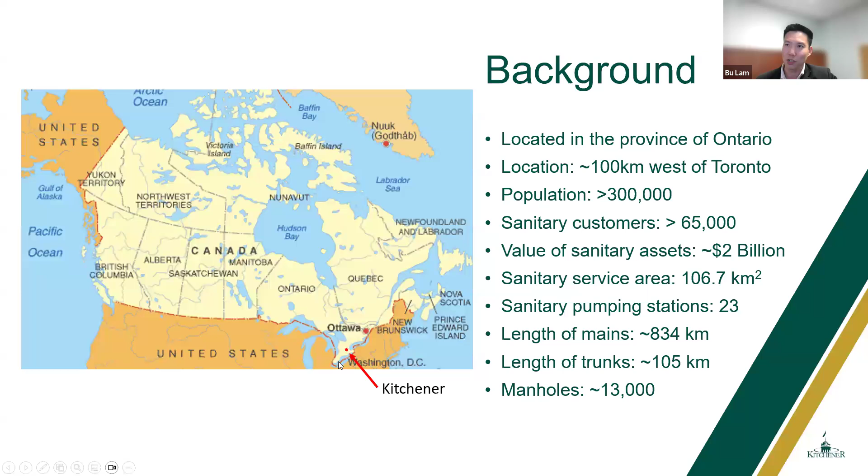Really quickly, some information on where we are in Kitchener. Here's a quick map of Canada. We're located in the province of Ontario. That little dot near the bottom, just above Washington, D.C., that's Kitchener. We're about 100 kilometers west of Toronto. Everyone around the world often thinks of Canada with Toronto as the epicenter, so we often reference Toronto when talking about where we're located.

So the CN Tower is kind of where that arrow is pointing, and Kitchener is approximately 100 kilometers west of there, so we're a little further from the lake. The city itself has a population of over 300,000 people, which translates to about 65,000 customers from a sanitary service perspective. The assets we have for the sanitary utility total just over $2 billion. Our service area is about 107 square kilometers, and throughout that area we have 23 pumping stations, about 834 kilometers of sanitary mains, and 105 kilometers of trunk sanitary sewers. There's also 13,000 manholes that we have to service.

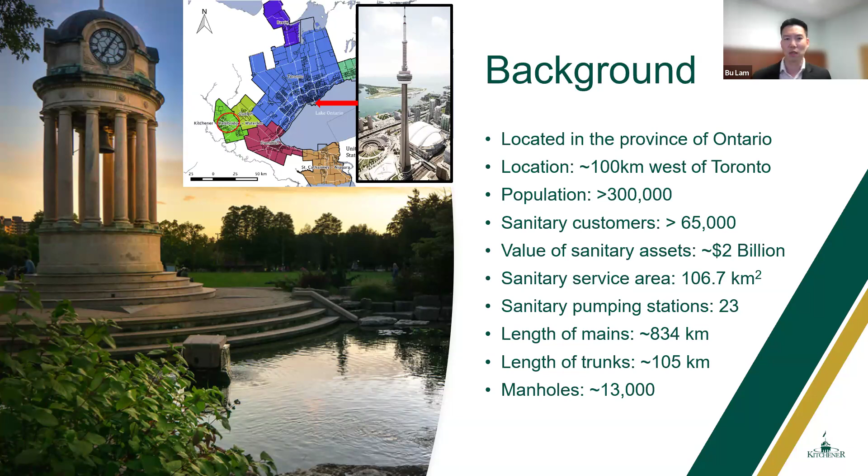I wanted to describe our approach to delivering wastewater services. When we're talking about our capital and our pipes, most are actually replaced through a linear asset replacement program, which are essentially full road reconstructions. We call it our triple-funded utility replacement program. This means the water infrastructure, sanitary infrastructure, and stormwater infrastructure, all residing underneath the road surface, typically get replaced at the same time. So if we're excavating for one utility, we usually take all 3 at once, which ensures the pipes in the worst condition get rehabilitated as much as possible, and also gives us an opportunity to fix the road surface. Typically we do about 6 kilometers of full road reconstructions on an annual basis.

We prioritize most of our projects from age and material. If we have condition information available, we usually apply that as well to make some of those decisions. So a pipe that might be 80 years old might be in better condition than a pipe that's 60 years old. In that case, if we had condition information, we would prioritize the 60-year-old pipe before the 80-year-old pipe for replacement.

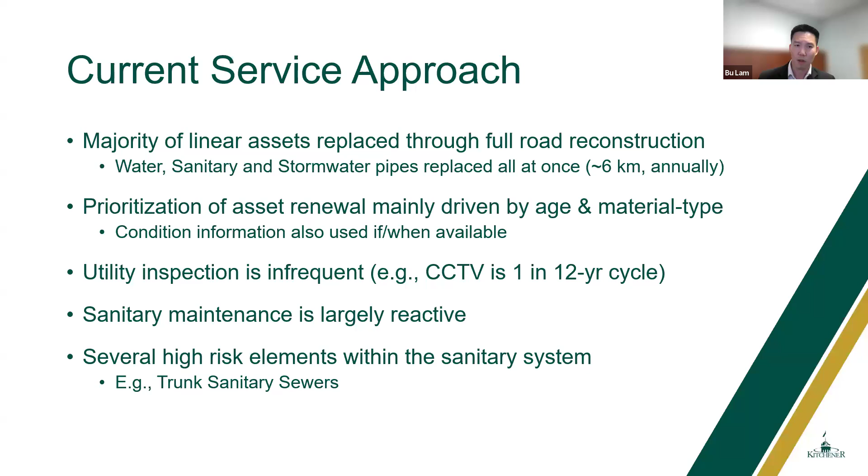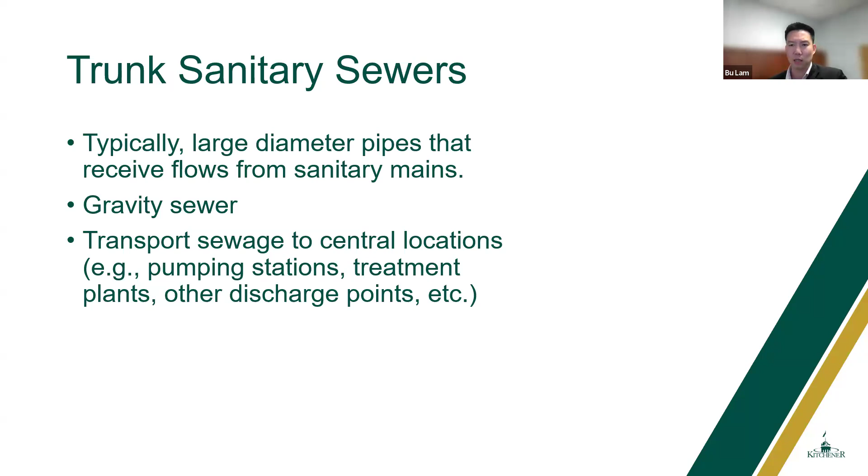Trunk sanitary sewers, sometimes called interceptors depending on the municipality, are typically large diameter pipes that receive flows from sanitary mains. They are gravity sewers, so there's no pressurization. The trunk sanitary sewers are meant to transport sewage to central locations like pumping stations, treatment plants, or other discharge points.

I often liken our trunk sanitary sewer network to veins in the human body. Think of arteries as the pipes that carry water into the system, and the arterioles as the distribution mains into the houses. The capillaries are really where the services happen to the houses, where the water is used, then flushed into sanitary mains that eventually go to these larger sanitary trunk sewers.

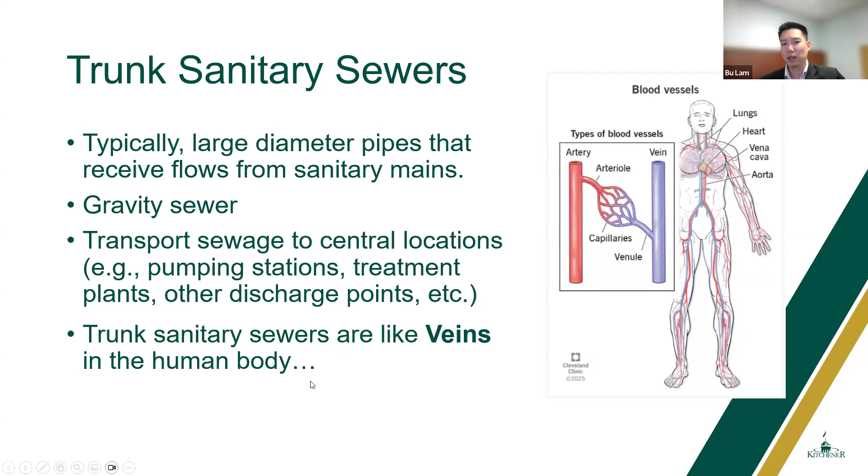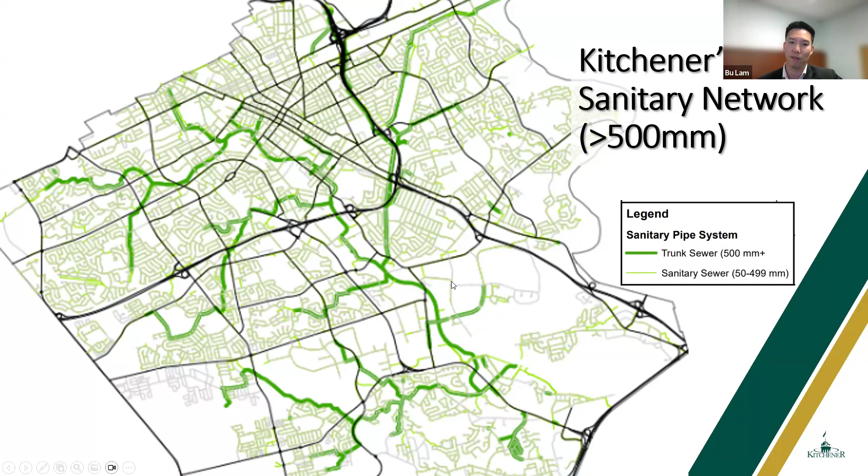There are actually 4 distinct neighborhoods that drain or get captured by this Ottawa trunk sanitary sewer. That drainage area is about 20 square kilometers, representing approximately 20% of the city serviced through that one trunk sanitary line. There are approximately 6,500 service connections to that trunk sanitary sewer. Even though that number seems moderately high but not super high, it's because a lot of this area actually has high rises and multi-residential units. A multi-residential unit may have, let's say, 200 or 300 people in it, but we only count that as one service connection. So again, there's a lot of connections, a lot of flow that goes through this pipe.

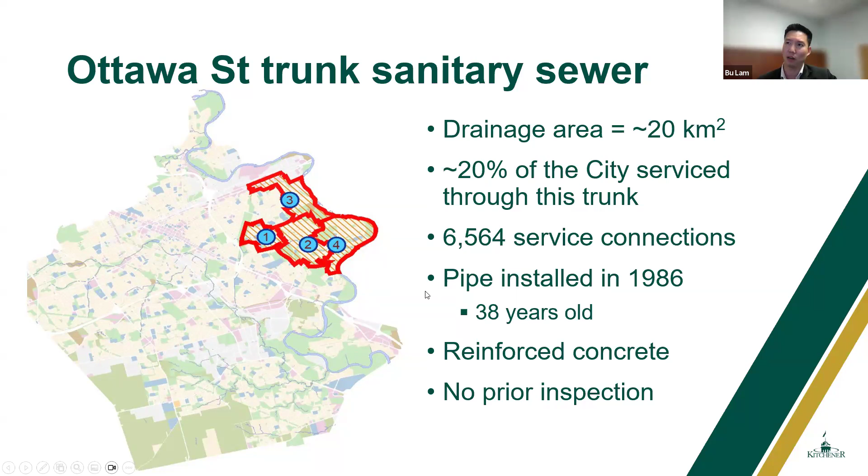The Ottawa Trunk Sanitary Sewer was installed 38 years ago, in 1986, so it's not that old. It's a reinforced concrete pipe. To our knowledge, since its installation in 1986, we've had no prior inspection of that infrastructure. So we really didn't have a lot of eyes on this, and we didn't really know the condition or the state that the infrastructure was in.

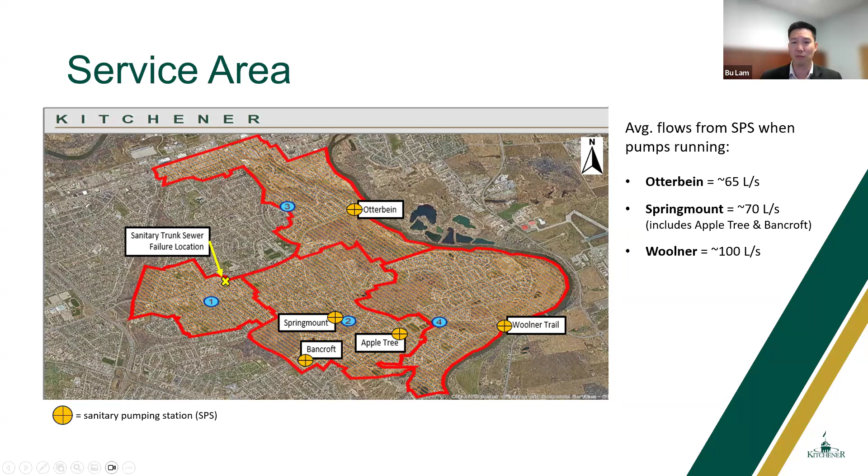So here's a Google image of what the area actually looks like. What I've done is marked the area of the failure with the yellow X. The direction of the arrow shows the flow, because the trunk sanitary sewers are all gravity fed. You can see how dense and how many houses there are, all feeding towards this one pipe that runs along the same parallel length of this road. So when you have a break in that one section, you're essentially disrupting the flow for this entire area of the city.

This road itself is Ottawa Street. It's a major street with 4 lanes, 2 in each direction, and it's also got bike lanes. In and along this area there are commercial establishments, and there's residential, as you can see. And just to complicate matters, this break happened to have occurred just outside a fire station, so we had to manage emergency response during our time.

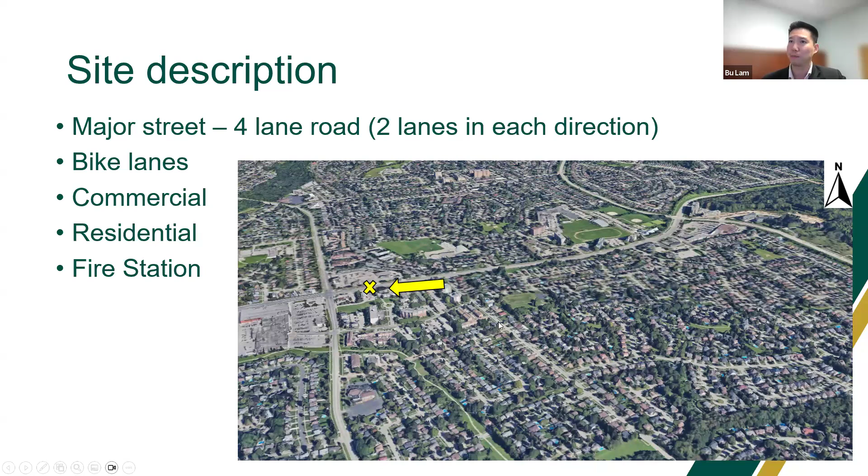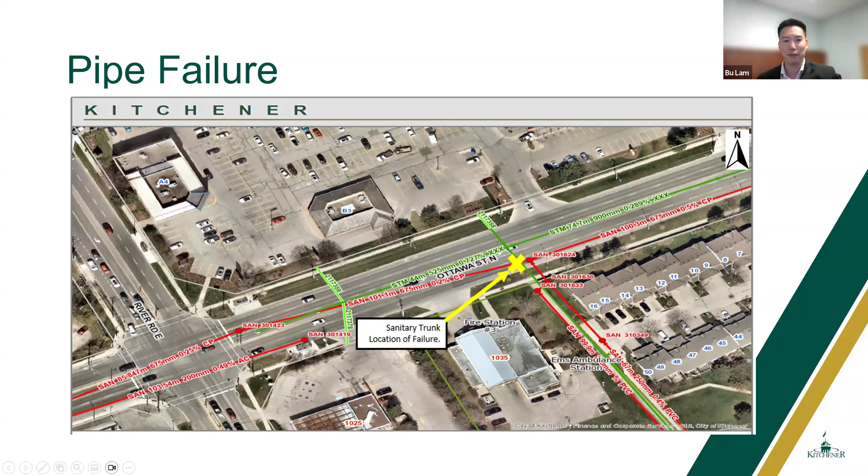This next slide zooms in a little more on this one area. Here's that fire station I was talking about, and this is the driveway they use for emergency response. You can see the break happened literally just outside where that fire station was. Again, this is the 4-lane road, a major intersection throughout the city, so a lot of different moving parts in a very inconvenient area for us to lose service.

So what I'll do now is go through a timeline of how this failure actually ended up happening. On February 17th, 2022, we got a few complaints from residents of sewage backups in the area, so we dispatched crews earlier that morning. Crews spent about 6 hours trying to clear that blockage. We knew it was a significant issue; we didn't know exactly where it was coming from, but we knew something was going on. That was our first hint.

Then the next day we got more calls from residents, so the crews returned to the site again and did their best to clear the blockage, but they weren't able to clear it enough for us to get a camera down there to examine what was actually going on within the pipe.

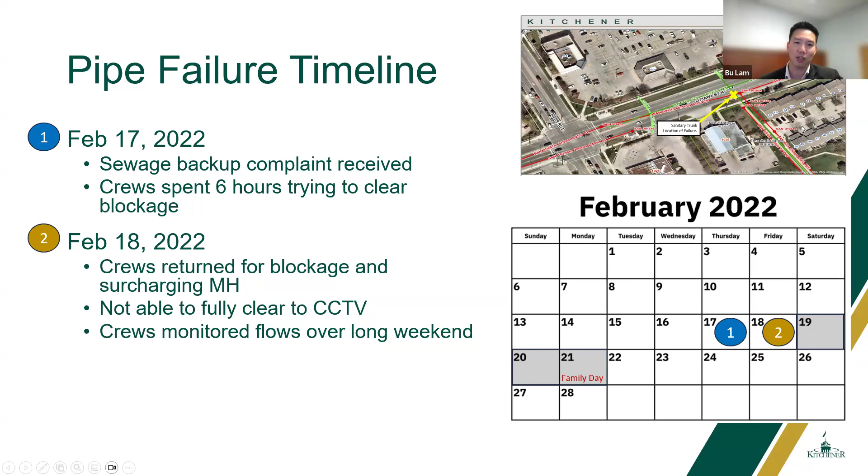Now, the reason I have a calendar here is that in the service industry we often say these emergencies only happen on a Friday before a long weekend, and literally this was a Friday before a long weekend here in Ontario. So on Friday we discovered this, and instead of trying to address it fully because we didn't know the full extent and weren't able to get a camera down, we decided to have crews monitor the flows over the long weekend and respond as needed. We didn't enact any larger measures until we did more investigation following the long weekend.

Finally, on the Tuesday after the long weekend, we were able to clear the blockage enough to send a camera down there, and what we discovered was a massive void in the pipe. The pipe had fully collapsed. The reason the blockages were being created was because all that sand, rock, and gravel was getting into the pipe and clogging it.

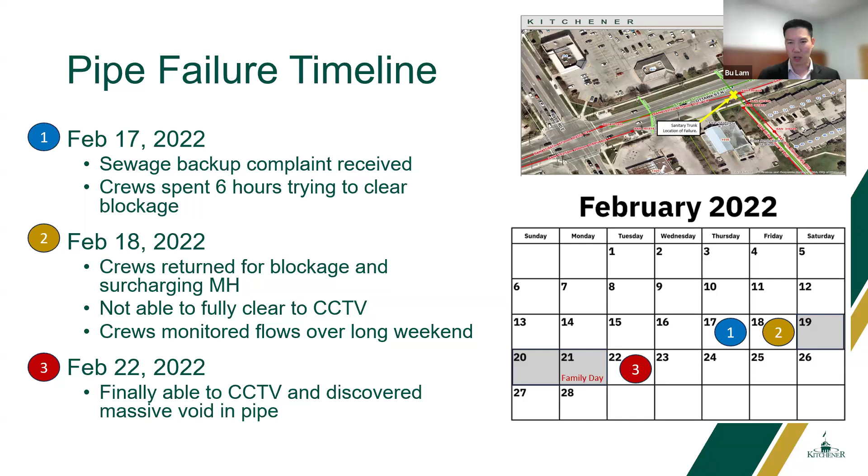So when we finally did excavate, that void was large enough to actually swallow a city bus. That gives you an indication of just how big the issue was and how big that sinkhole was that was forming. Needless to say, we quickly got our heavy equipment off that area since it was just kind of floating on top of that void.

As we were excavating and looking at the damage that had been done, we noticed that the concrete pipe that was there typically should have had about 2 inches of thickness on the wall. That 2 inches of thickness had deteriorated to less than a centimeter in some sections that were still intact, and then it had completely broken through on sections that had collapsed.

A large part of the corrosion and disruption we saw in those pipes was actually due to hydrogen sulfide gas, H2S gas. That's a byproduct of sewage that decomposes, especially if it gets stuck inside your pipes and isn't flushed out quickly, or if you're getting high concentrations of sewage with H2S gas already in it from upstream. We suspected it was more the latter, that we were likely seeing a lot more of this overstrength sewage getting into this particular section of pipe.

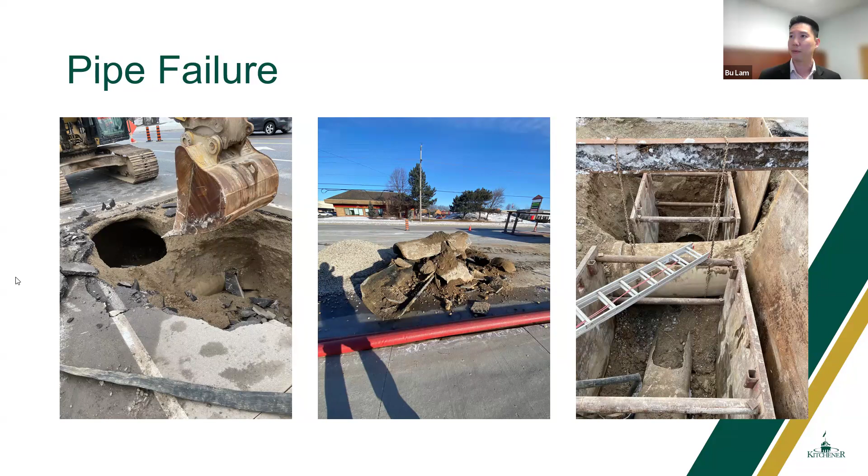So how did we actually address that repair? After we discovered there was a massive void, we knew we needed to get this line back in service. It services 20% of the city, which works out to about 60,000 residents. Telling 60,000 residents not to flush their toilets for a few days would have been very, very bad news.

So we knew we had to enact a solution fairly quickly. For us to address that one section of pipe and do a temporary repair, we had to stop the flow of sewage through that pipe. There's about 250 plus liters per second that flows through that pipe, so we had to bypass all that sewage.

We were able to bypass for about 60 hours from 4 pumping stations. Remember, there are 5 pumping stations that service that one pipe. We were able to divert and bypass flows from Springmount, Bancroft, Apple Tree, as well as Woolner Trail. Otterbein, we knew, would have put us over our ability to manage those flows through a temporary bypass.

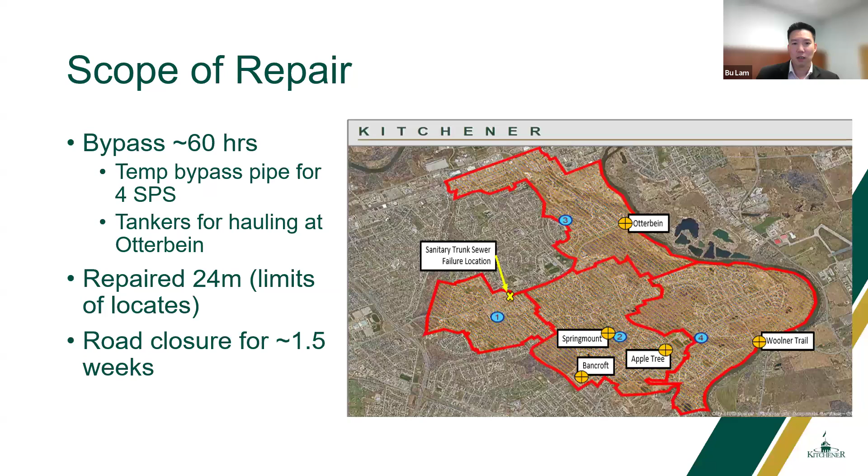We ended up repairing about a 24-meter section of this sanitary trunk main. The reason we only did 24 meters was that was the limit of our locates, the limit of the information we had on other buried infrastructure, which restricted us to doing work only in that area.

At one point, I think we had every single member of our operations team out there trying to manage this site and manage the work. We also had to call in for help from our neighboring municipalities, who sent equipment and other operators as well.

We ultimately had to enact the repair for just approximately 3 days, but the road itself was closed for about a week and a half. That was due to the fact that we weren't able to restore the road in the middle of winter for a period of time until we could secure some asphalt.

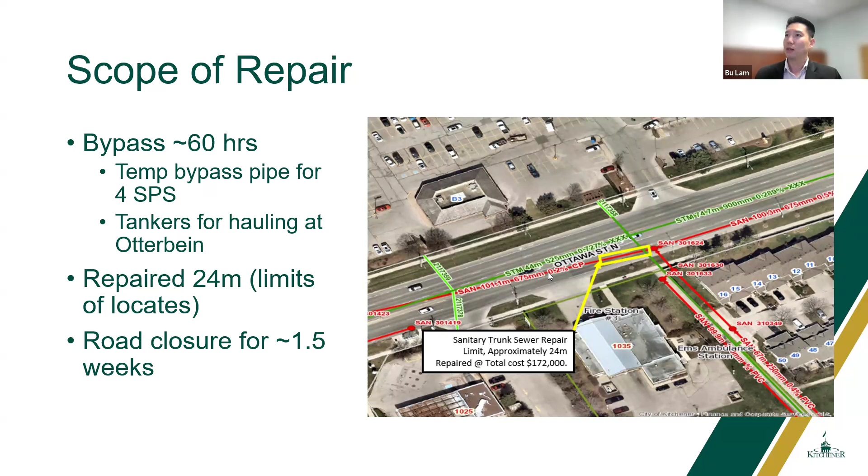So here are some pictures from the actual repair itself.

I'm not seeing your presentation for a little while. Is it on? I'm seeing it, yes. Oh, you are? Okay, I'm not seeing it. Well, it's not on your side, it is on your side. We see the presentation, okay perfect. I'm glad the presentation's still up. Sorry Valerie, I don't know how to troubleshoot that on your end. Don't worry, as long as everybody else can see it.

Okay, so I'll continue. Here are some pictures from the actual repair work itself. The picture on the left is our bypass. As I said, we had to bypass the section of pipe that we were repairing. So we were essentially pulling the wastewater out of that section upstream and running it down a hose that stretched about 200 plus meters to another downstream manhole where we were then discharging. We were bypassing about 100 liters a second through that bypass, and that bypass was lasting for about 60 hours. That bypass was managed and manned 24 hours a day for those 60 hours.

One of the things I didn't mention previously was that this work was in the middle of winter. The temperatures on average over that 3-day work were between -5 and -15 degrees Celsius, and that doesn't include the wind chill. With the wind chill factor on top of that, it felt more like -25 to -30. So very difficult conditions to work in, but we were able to get a lot of that work done. You can see just what type of construction work it was. We had to put some construction shoring in to secure the section before they were able to drop in a new section of pipe.

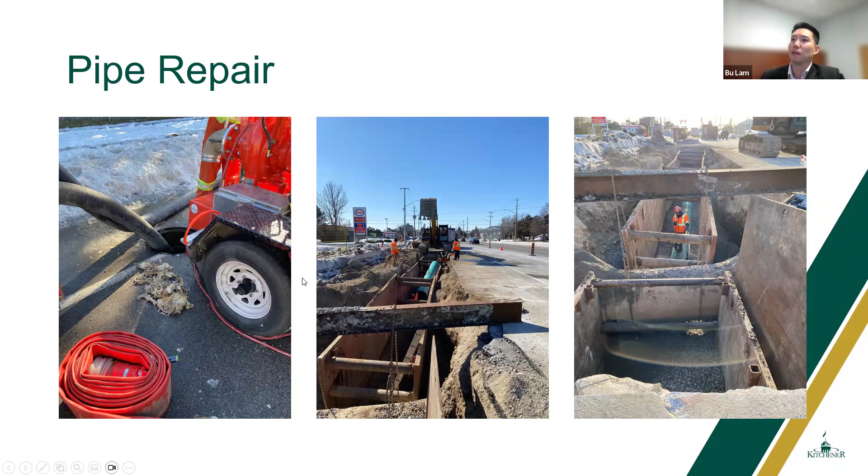Repairs took 3 days. The road finally opened up a week and a half later. Everything went back to normal, and flows were reinstated for the customers. I would say this was more or less a success, because during that entire 3-day repair period where we had to bypass, not one customer of the potentially up to 60,000 customers that would have been impacted experienced a disruption in their service. So we've basically said that was a very successful operation that we were able to do.

But after the actual initial emergency response, we really had to pull up our sleeves and do some post-repair investigations to figure out just how much of the rest of the pipe was in bad condition, and whether or not we needed to address those other sections. So part of our post-repair investigations was to look at the entire length of this trunk sanitary sewer, which was about 1,700 meters. 38 sewer sections were investigated. Of that 38, 20 were shown to have severe structural deterioration from H2S corrosion. The remaining sections also were impacted, but those impacts were low to moderate.

Now, what we also did was put in some upstream H2S monitoring equipment just to see what level of H2S was entering that system, where it inserts through the force main. What we were seeing were average H2S concentrations in the 60 ppm range. It spiked to an average range of about 160 ppm, and our peak at any given point was 220 ppm. Just to give you an indication, anywhere between 5 and 10 ppm can lead to concrete corrosion. So these are orders of magnitude higher than what we would anticipate having in our system, which would explain a lot of the results that we ended up seeing.

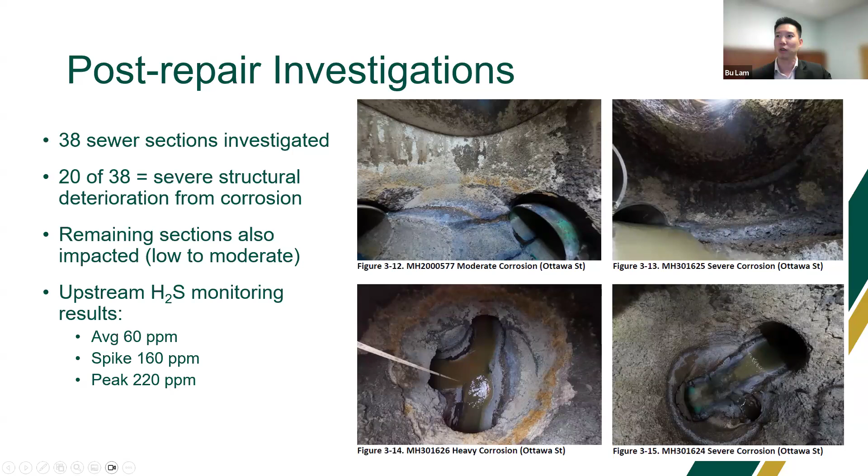You can see some of these results here in the photos, where this is kind of moderate corrosion, but you can see some of the severe corrosion of the concrete that was in our system. So these sections were essentially ripe for collapse, ripe for failure. We were just fortunate that that one failure happened, which gave us the opportunity to go in and inspect the rest of this infrastructure.

What we have now planned to do to address the rest of the corrosion and the rest of the damage to the pipe is to do rehabilitation works this year. We've already tendered this work, and we've been planning it for the last year and a half. It's going to be 1,700 meters of cured in place pipe.

And we're also going to address 24 manholes as part of that work because of the deterioration that we've seen there as well. This project alone is going to cost us about $7 million.

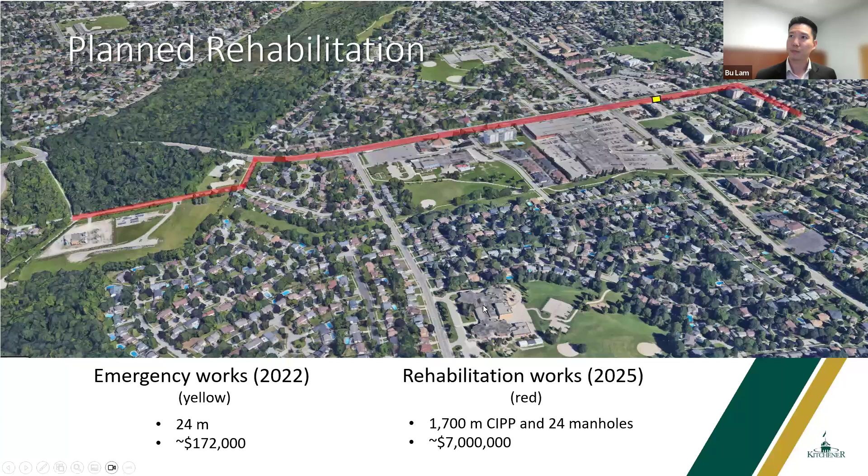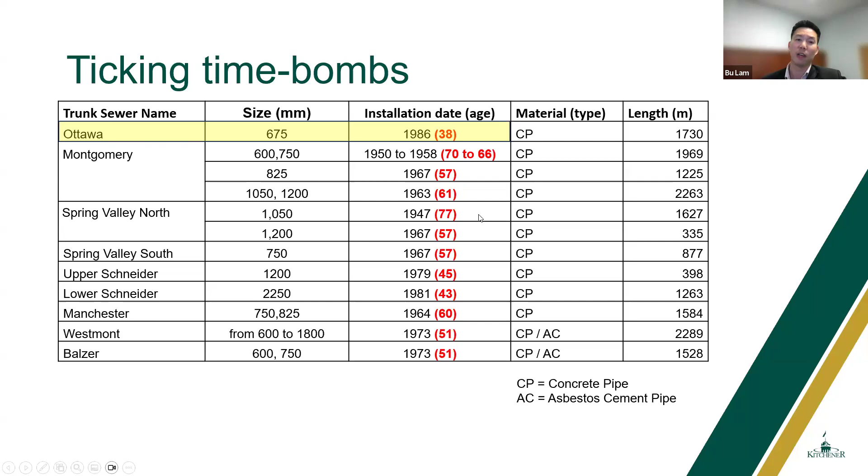And if you really look at two of the major concerns, we have Montgomery Creek here that's about 70 years old, and the Spring Valley North trunk sanitary that's 77 years old. This pipe here is 40 years older than the Ottawa Street pipe that we had to do an emergency repair on and now are doing rehabilitation work on. And none of these sections do we have any inspection data on. So this is why we call them our ticking time bombs.

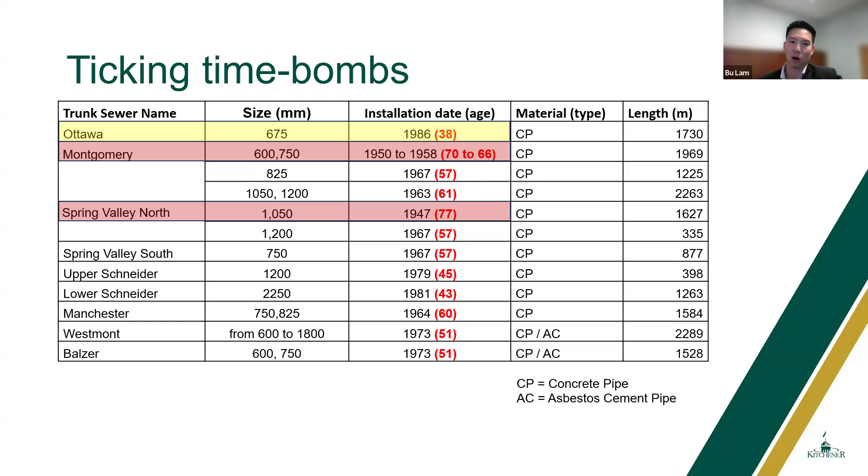And again, the trunk sanitary sewers are the major pipes that collect all the sewage from certain neighborhoods around the city. So any impact and loss of service on these pipes alone will generate a significant impact back to our customers and our users.

So why haven't we done trunk sanitary sewer inspections in the past? That's a good question. And we don't have a lot of data because the data has always been very, very hard to gather.

So a lot of the technologies that are out there, where there's camera inspections and things like that, have a very hard time managing that level of flow to be able to get any detailed information for us to make that assessment.

Also, some of these trunk sanitary sewers are also very, very large diameter pipes, so a meter or more in some cases. And because they're so big, some of the technologies that we have are limited in how well they could generate the high resolution images that we need to be able to assess the condition of those pipes.

And in our trunks network in particular, some of the access points are very limited. So we could have stretches over 1 kilometer long, stretches where the 2 insertion points into that pipe are over a span of more than 1 kilometer. And because of that distance, it's really, really hard to employ certain technologies because certain technologies just don't have the capability to go that distance, especially technologies that are tethered to a system like some sort of drone or a boat.

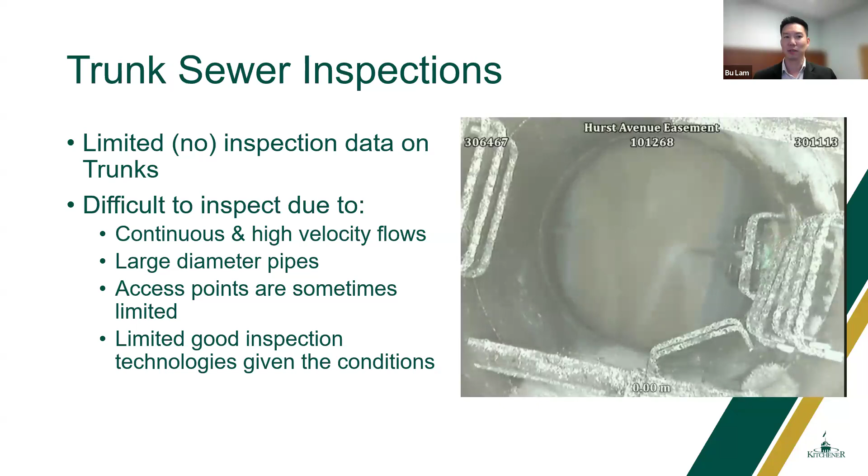So yes, we've definitely had some challenges in our trunk sewer inspections, but we need to figure out a way to be able to do these inspections because, like I said, these are just ticking time bombs for us.

So some of the lessons learned from this failure: clearly, system monitoring and inspection is a critical aspect we need to focus on. Corrosion of concrete pipes from H2S gas is a big problem, and we don't know the extent of how much H2S gas is actually in our system. We need to figure that out to assess what level of risk most of our concrete pipe is at for collapse and other failures.

Despite the challenges we have for trunk sanitary sewer inspections, we have to find a way to inspect this infrastructure because it is one of the highest risk infrastructure we have in the city. Ultimately, emergency repairs like we had for that 24-meter stretch become very costly. So if we really want a financially sustainable way of managing our system, we should be looking at proactive repairs and rehabilitations of these sections before they fail.

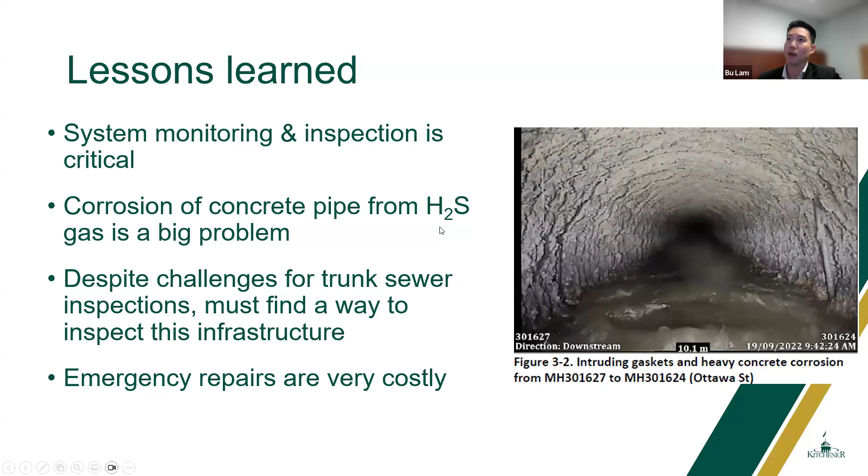So how do we use this as a catalyst for change? I started off this presentation, and it's in my presentation title, saying that we never want to let a good crisis go to waste. This crisis was one that our council knew about. They were kind of waiting with bated breath to make sure no residents were impacted. Because we came through with a good news story, I think everyone was relieved at that, but no one wanted to go through that again.

Because of that, we used that as the basis point in developing what we call our Water Infrastructure Program, or WIP. Our WIP is really just a large business case that looks at multi-year rate increases, or multi-year rate setting for our utilities, to ensure we could develop a plan for financially sustainable and robust delivery of our services. We used this crisis as a case study in this program, highlighting the need for us to prioritize our inspections and our data collection.

We prioritize monitoring of our system, and we wanted to take that information we're collecting to make better decisions on how to address aging infrastructure or these high-risk sections. So what we did was we developed that 2024 Water Infrastructure Program by utilizing this case study.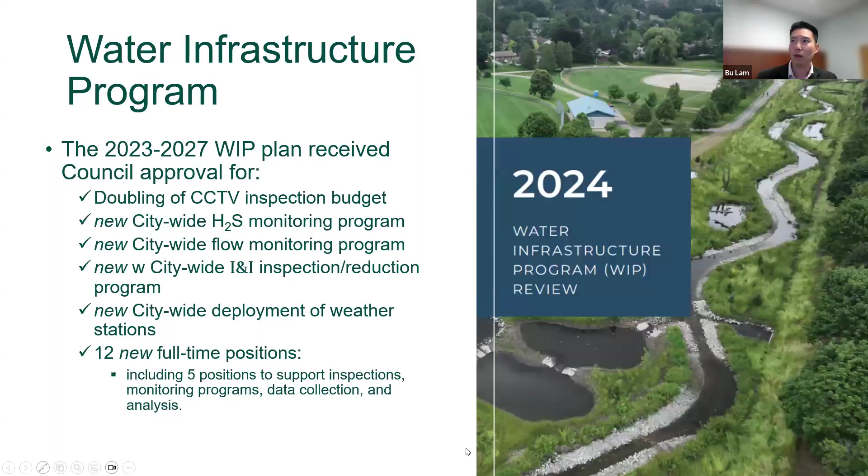So the goals of the WIP, as I've just mentioned, is we want to get to data-informed decisions. We want to be able to take that data and help us establish appropriate levels of service, and ultimately help us right-size our budgets so we can deliver these programs in a more sustainable fashion. When we have these emergencies that pop up, and when we run infrastructure to failure, we never know what the costs are. Being able to use that data to understand our system better and appropriately budget for those programs to be sustainable, that's the long-term goal we need to get to.

So key takeaway: never let a good crisis go to waste. If you have a crisis, yes, you have to manage that crisis as best you can in the moment.

But when that crisis is over and you're able to reflect on it, make sure you take that opportunity to use it as a case study, use it as an example, and use that in a way that drives a program improvement later on that either secures you additional budget or secures you a pathway for you to make your system and your utility a little bit more sustainable.